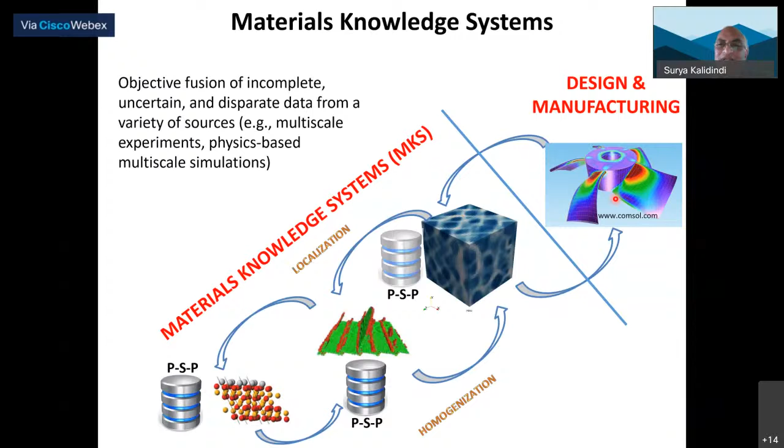And that's basically how the Google search engine works. It is continuously learning based on the queries, and once you have the queries, you reprioritize your internal knowledge systems, the way you're accumulating these knowledge systems. In some sense, it decouples the activities. So in material science and engineering, we could constantly be building these knowledge systems 24/7, and simultaneously give instant answers to the questions that come up. So that's a vision.

Now, some more details of how that can be implemented. One detail is that we have to define PSP linkages at different length scales. Again, in material science and engineering, process-structure-property has been used pretty much since the birth of the field. The only difference is that I'm extending it to different length scales.

As a specific example, I'm saying at a molecular scale, the placement of the positions of the atomic species or chemical species is a process variable. If I define that as a process variable, the electron density field would be a corresponding structure variable. And the property, just as an example, is bond energy. These lists are not supposed to be comprehensive. This is just to give you the ideas of what I'm thinking of with the picture before.

Now, you could argue that if our community gets together, we should be able to organize this. It shouldn't be that complicated. The main issue is that I think we'll settle very fast on mathematical definitions of process and property, because for the most part, they're very well defined.

What we're not going to settle on is the quantitative definition of structure. Exactly what do you mean by microstructure? What do you mean by interface atomic structure? How do you quantify that? Not a qualitative definition, but a quantitative definition. And that's where we're going to struggle.

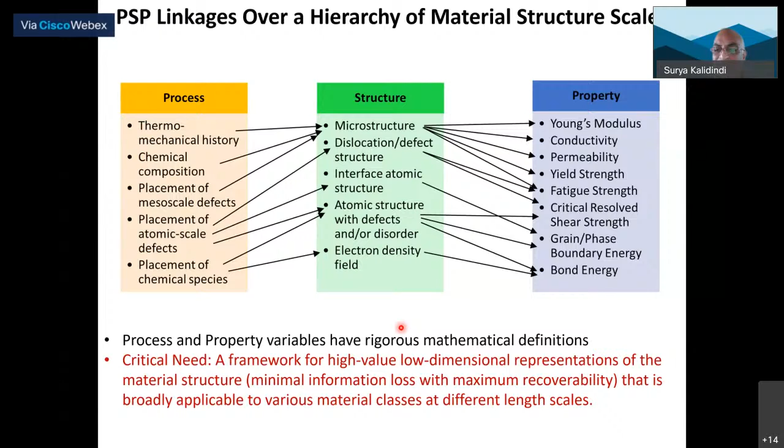Now, I have only one slide of the underlying math. It gets very complicated, so I'm not going to do too much of the underlying math. There are papers you can read if you're interested in this. But the way we are going to build these PSP linkages recognizes the uncertainty, but it also recognizes the fact that we have little data.

We have small data, as opposed to, say, driverless cars, for example. The people who are designing driverless car systems have an incredible amount of data. So we can't use the tools that they use. We need a different set of tools. So given those criteria, it turns out Bayesian learning, Bayesian frameworks, or Bayesian statistical learning, which is just an advanced version of statistics, that's all it is, is actually quite appropriate for what we want to do.

And the second question that we have to deal with is, what exactly are we going to learn using machine learning? Machine learning says you're trying to learn something, but exactly how do you define what it is that you're trying to learn? So the argument that I'm making in this paper and in this equation is that what we really want to learn is the governing physics in the phenomena, whether it is deformation mechanisms like Dr. Placid Rodriguez was interested in, or all the other things that we are interested in. For a given sample you give me, I want to know what is the governing physics in that sample.

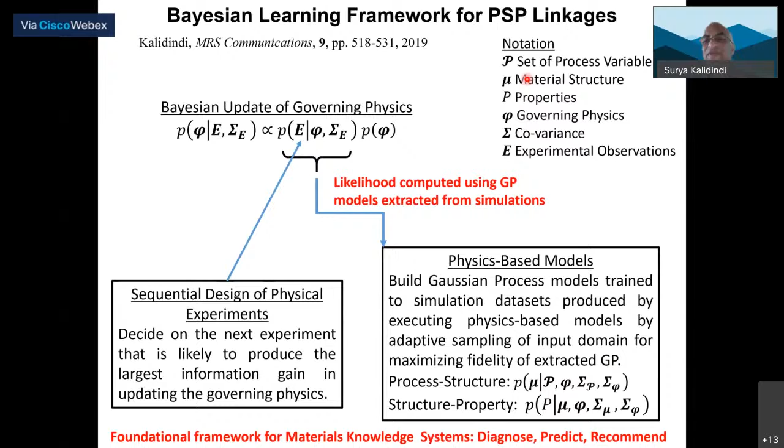So for this, we use the formalism of n-point spatial correlations. Spatial correlations are like autocorrelations and cross correlations. If you take this image and do an autocorrelation of it, you'll get this. The autocorrelation is called a 2-point correlation, because you can interpret it that way: the 2 points of interest are the 2 points separated by the vector, the tail of the vector and the head of the vector.

So the raw image is black and white. Every voxel in this simple example is either white or black. And the pattern you're seeing here is called a 2-point correlation, and it tells me something about the patterns I see here. For example, it's telling me that the most common pattern here is this cross. And keep in mind that this is periodic, and if you look at it carefully, you'll agree that, yeah, that's the most common pattern.

But there is more than 2-point statistics. There are a lot more things that can be computed. But essentially, this formalism is a way of quantifying the local neighborhoods you're likely to see. When you randomly pick a point in the microstructure and ask, what does my neighborhood look like, it gives a statistical description of that neighborhood.

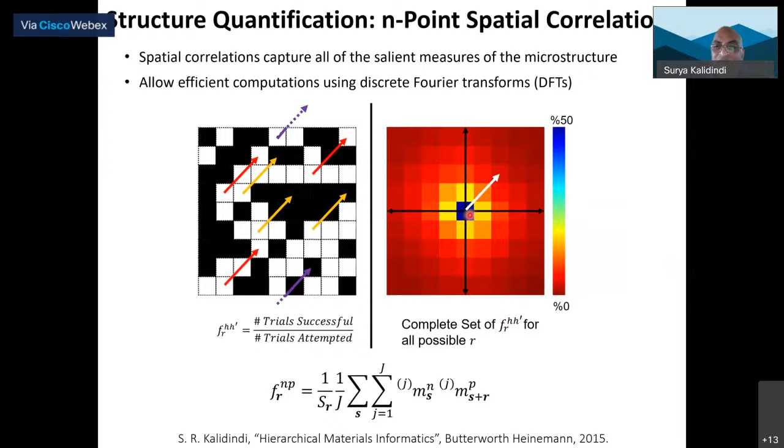So to be able to practically use it, I take all those features and do a PCA, a principal component analysis. And the principal component analysis is another orthogonal or Fourier representation, but in a discrete sense, because these are vectors essentially. So now I take all my features, put them into a vector, and then I can find the basis, and then I can find scores, PC scores. So it's pretty much like representing complicated functions in terms of sines and cosines and the weights of sines and cosines.

Turns out for most microstructures, the real feature vector is like this. But if I am willing to take a small approximation, I can represent all the statistics that I see here with just 3 numbers. I only need 3 final features. And if I have these 3 numbers, then I have a very good representation of the microstructure with all its complicated statistics. And now I can actually formulate my PSP models. So that's basically the story.

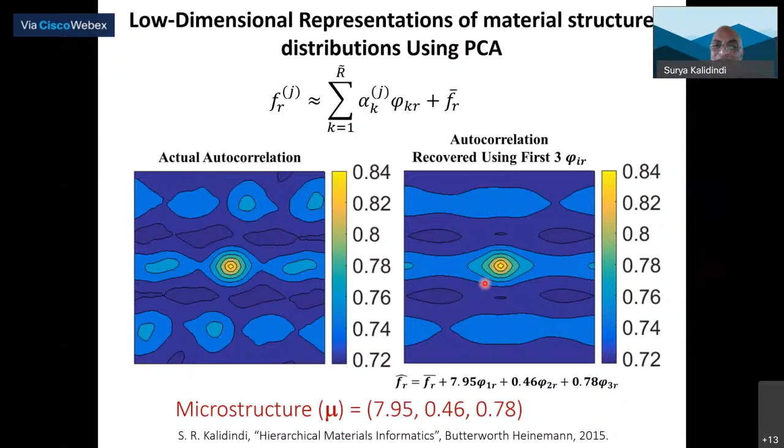I know I went over some of the details because they are very mathematical beyond what I just said. Happy to discuss with anybody who is interested, but that's about it. I'm not going to do any more than that.

Okay, so now examples. From now onwards, I'll just show you examples. Should be easier. So the one example that I have here, just to give you the sense and the power of the technique. This is a knowledge system that we created. In this knowledge system, you as a user can come in and put in a 3D RVE with any morphology. We have no restrictions on shape, size distributions, volume fractions, morphology, connectedness or not. It's up to you. You can put in any morphology you want.

Not only that, you as a user can also assign any hardening law to each of the phases. So we put no restrictions on what hardening law you can put for the red phase and what you put for the blue phase. Under the hood, we have already pre-computed these models using finite element analysis on example microstructures. So we created our own microstructures. We ran the finite element models. We created these models already.

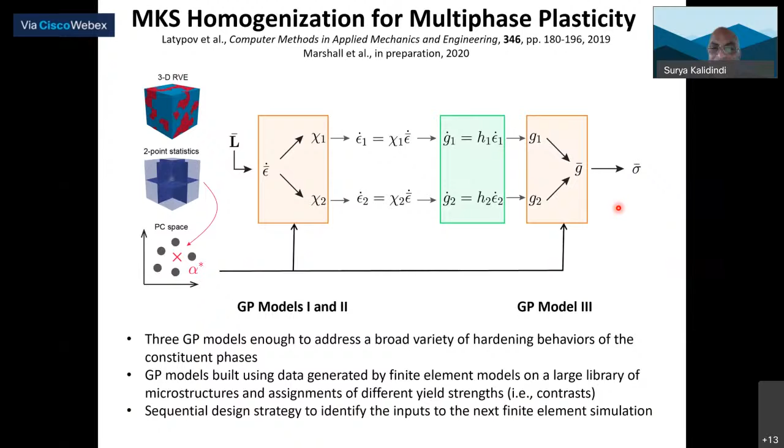And again, this is where things can change. Now if I know what people are looking for, next time they come, I can actually devise this methodology in such a way that I can give a better answer next time.

Okay? And all of this is fully autonomous, not just automated, but fully autonomous in the sense that the computer has been shown how to create these meshes. It'll create its own microstructures, creates its own finite element meshes, sends them to a finite element solver, takes the results, and automatically keeps adding data sets where it wants. And so it's continuously trying to improve itself as people ask for more things.

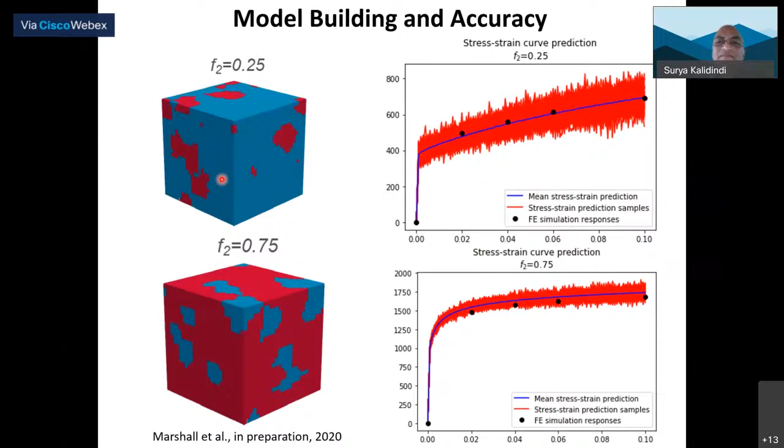Now that's a simple two-phase microstructure. Going forward, I can say that the same ideas, the same feature engineering, can be easily extended to 3D polycrystals. So now each voxel actually has a crystal orientation. It's not just a phase anymore. It actually has 3 Euler angles to define a crystal orientation.

And people generally use pole figures to see the texture, but that's what we call one-point statistics. 2-point statistics actually captures information like grain size distribution, grain neighborhood, and all that information is in the 2-point statistics. The feature engineering is exactly the same, and then it can make predictions for effective properties, modulus and yield strength.

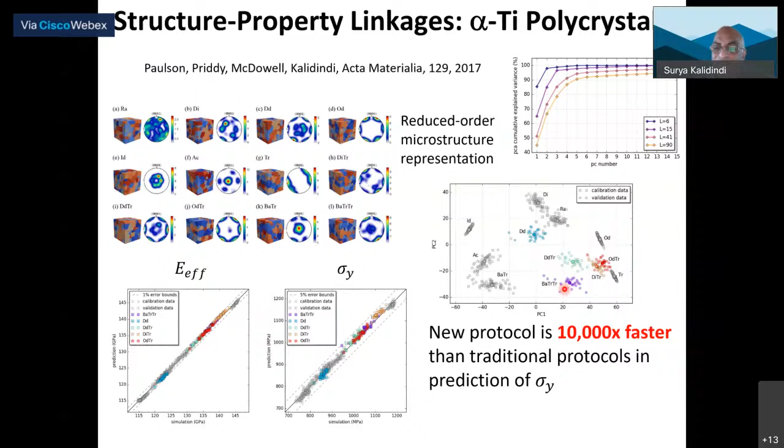Okay. And also, generally what we do is gray color points are the points that are used in calibration or training the model, and the colored ones are the ones that have not been in the process. The model building process has not seen them, so they're called test points. So the idea is to show that the test points are well predicted without an overfit. Right? So the biggest thing you worry about is overfit in all these models.

This is not just mechanical. You can actually take porous solids. Now the RVE is porous, and now we are actually predicting permeability, flow. And that's complicated because flow depends on connectivity. Yet I'm still using the same n-point correlations. They're slightly different, but essentially the same framework. The feature engineering part doesn't change a lot. And we are able to make predictions of permeability.

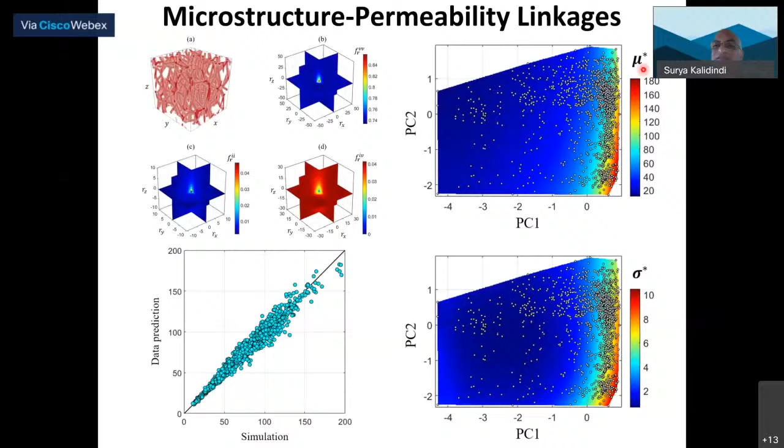Again, this is a parity plot. This is the mean prediction. So one dot is for one structure, different dots are for different structures. And this is the uncertainty. So this is the mean value, this is uncertainty. And you can see they're pretty decent.

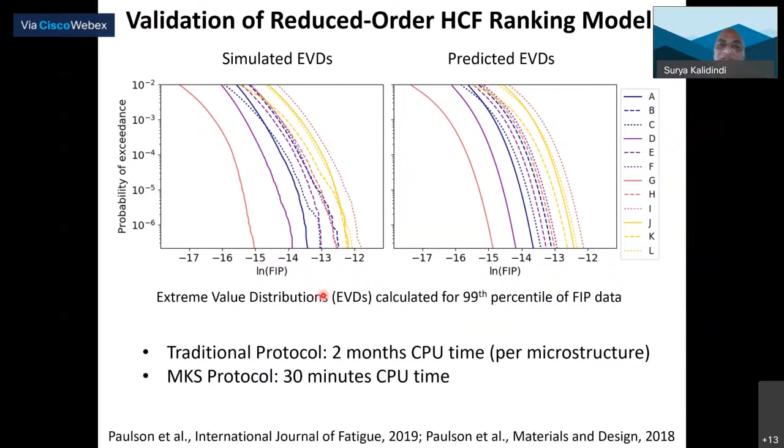And if you are using physics-based models, you would use crystal plasticity models to compute them, and they take a long time. Each simulation takes a very, very long time. And these are much faster on a relative basis. You can see the comparison. And the ranking is about the same. Of course, there are some differences, but the ranking is roughly the same. And the fit is pretty good.

And because we're looking at microstructures in terms of these PC scores, the predictions are showing how well the low dimensional representation of the microstructure is captured in this evolution. So it's not restricted to just static problems. You can actually do temporal problems, temporal evolution of microstructure.

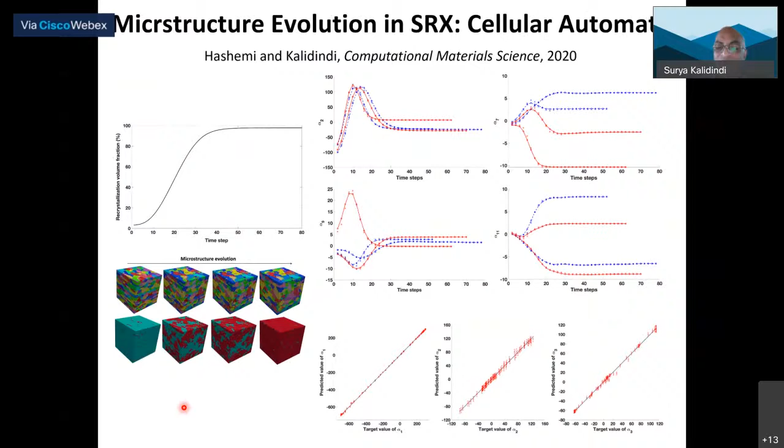It's also not restricted to mesoscale. You can do the same with the atomic scale. So we take atom positions, we voxelize it, then we do 2-point correlations, PCA where necessary, more or less the same feature engineering, but maybe slightly different in the model building part. And here there's a large data set of compounds, and we are predicting the formation energy. And it does a decent job over 1,800 different compounds.

This is grain boundary mobility in a single material system. The data here comes from MD simulations. In the previous case, the data came from a public repository. We just downloaded the data. Here, the data comes from very expensive simulations, so I don't have as much data. And yet we can show that the feasibility of building these low dimensional models is still very much there.

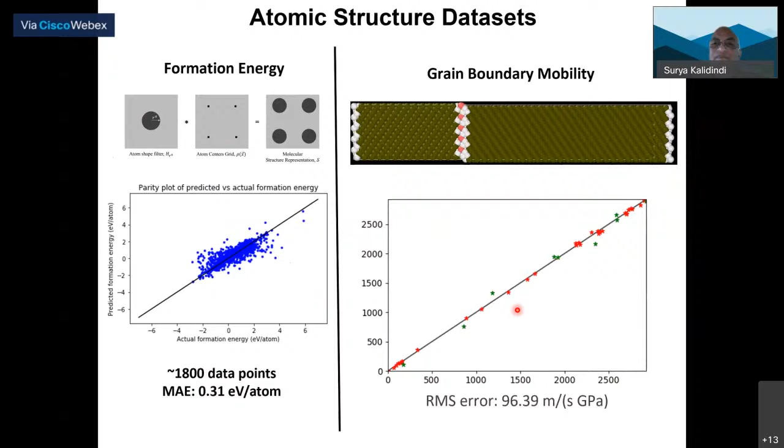Everything I showed there is about homogenized properties. It turns out that another version of this can actually predict the local fields. So now we're not just interested in the effective properties of the microstructure, but we want to see the strain field or stress field, voxel by voxel.

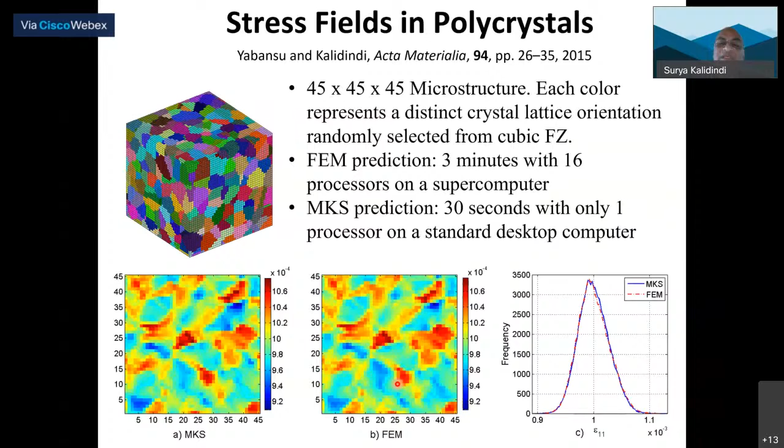This is elasticity. You can do the same in plasticity. In plasticity, you worry about the plastic strain rate tensor, and these are the 6 components of it. We can do every component in every voxel for any microstructure of that material system. We are now beginning to say any material system, but we are still working on that.

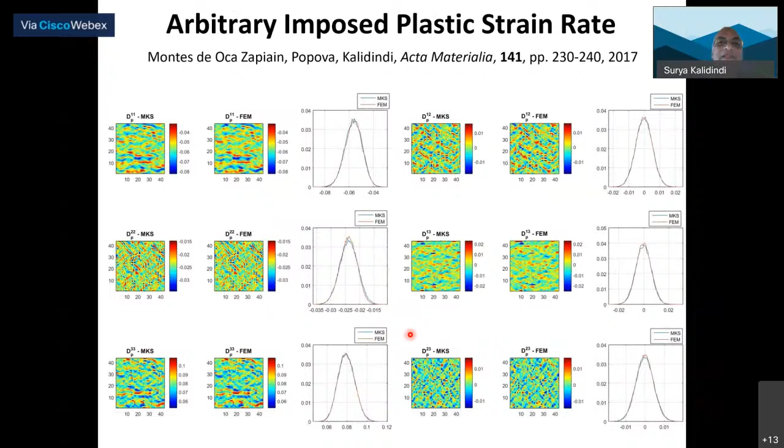So these are the big things I want you to keep in mind before I stop that part of the talk: these are broadly applicable knowledge systems. We are trying to be very efficient in how we build this, such that we don't have to go back and rebuild these models all the time. Because then we really haven't addressed the problem.

Now you get a sense of what we are doing and how we are capturing knowledge from physics-based models. On the experimental side, we are also asking how we can generate more data. Most of the classical experiments in material science are what I call high quality but low quantity experiments. In other words, we get few data points, but they are very high quality because you take great pains to prepare samples and document a lot.

That definitely helps science and solves a lot of science problems. But if your target is to speed up innovation, you want guidance so you can rapidly screen materials and get a lot of data. You're willing to accept a little bit of uncertainty or error if you can get a lot more data at the same time. So that's the paradigm - where is the trade-off in quality versus quantity?

These are all high throughput methods that we are interested in. We want to develop these methods and see how we can speed up materials design or materials exploration, which is a very large space because it includes chemical compositions and process histories. Every time you change the process history, it's another material, and we want to characterize and understand it very fast.

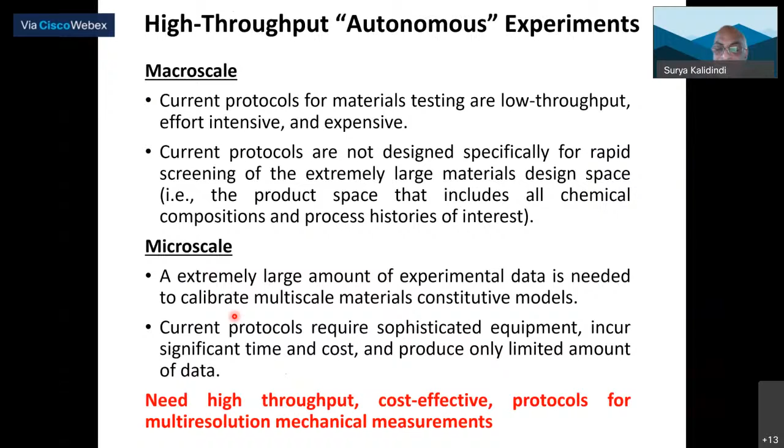The technique that we have largely spent our time on for mechanical properties is indentation. This is an indentation stress strain curve - raw data, you get a load displacement curve. These are spherical indenters, not sharp indenters. The advantage of spherical indenters is there's a very small elastic portion.

By looking at it, you can't tell where the elastic portion is, so you need an analysis protocol. We developed the right analysis protocol to identify this elastic portion, but it's extremely small, tiny - you can hardly see it. If you identify that elastic portion correctly and apply Hertz theory, the equations here are nothing but Hertz theory, with just a generalization of the definition of strain. That's the only addition on this side.

If you adopt these four equations and identify the elastic portion correctly, you can convert this load displacement curve, which looks very smooth, into something more useful. You can't tell by looking at the raw curve where the elastic portion is versus the plastic portion. But if you do the analysis right, you get a beautiful stress strain curve where you can see the elastic portion and the plastic portion, and now you can do an offset yield strength definition.

So these are indentation parameters. This is an indentation modulus - you can define the slope of this line as the indentation modulus. You can define this as the indentation yield strength. So you can basically do this very fast. Once you learn how to do that, you can do this very fast.

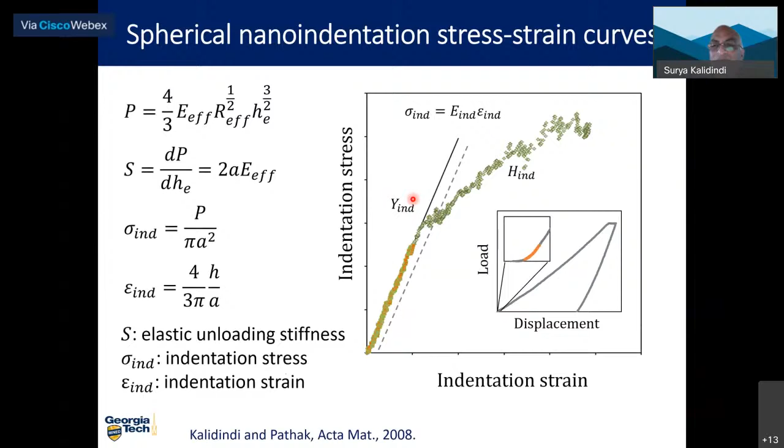So those are indentation quantities. How do you convert them to uniaxial quantities? We went through a lot of finite element simulations again, where we can prescribe the physics. So we said, if we assume that the material is isotropic and just does J2 flow theory, how do I convert? It turns out you only need 3 scaling factors.

And if you apply these 3 scaling factors, you'll get a very good match between the uniaxial curve. So in both cases, the red curve is a uniaxial curve. The blue dots are from indentation, but scaled by these quantities. So once I scale this, then I can get a pretty good match.

And it happens independent of hardening laws. So the material can show all kinds of different material. Again, we have done a lot, all the way from very hard and high hardening rate materials to low, soft and low hardening materials.

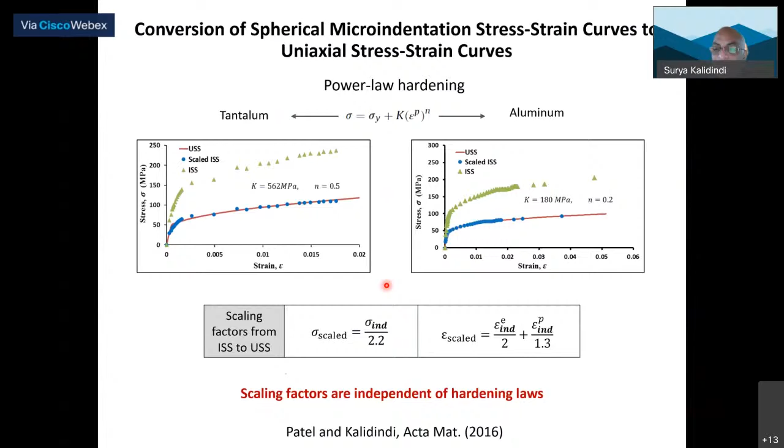This particular one is along the same lines, but this time we wanted to know what is the error in just the estimation of the yield point, not the entire stress strain curve, just the yield point. And we are showing that these techniques are much better, much more accurate than the current techniques that people are using to convert hardness into yield strength, compared to any of them.

And again, keep in mind the range, right? The range is very large, right? So again, it's from this end to that end. And we are covering a very large range of yield strengths, and we are still getting pretty good answers.

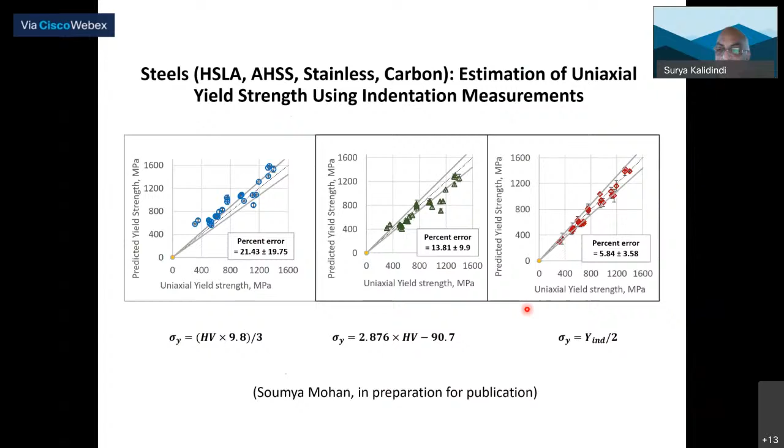Now, how do we use some of these techniques? One of the things we have done is to look at high throughput synthesis and exploration. So this particular sample was made by LENS, and it has a gradient. It was made by Pete Collins at Iowa State University. Here he is getting a composition gradient from titanium at one end to titanium manganese at the other end, so you get different chemical chemistries.

And then he makes bars, and then he post heat treats them. After making the bars, he is post heat treating them at 3 different temperatures. So we have 3 bars. And then of course we can do microstructure analysis and quantification, so on and so forth.

To get various measures like chord length distributions, volume fractions, and other things. But most importantly, we can actually get the mechanical properties just as fast, almost as fast as you can get the rest of it. In fact, the samples are the same samples. We are doing the microstructure, and after we get the microstructures, then we are just indenting.

So in some sense, the added cost is very little. And you can already see that some heat treatments are giving us much higher yield strengths than the other ones. So we can actually rapidly explore.

But using these Gaussian models that I talked about, you can also ask about sensitivity and things like that. So you can actually see that once you start analyzing this, you can actually tell which are the more important variables. So for example, what this says is for the chord length in the beta, the size of the beta is a lot more affected by the temperature, because that has one of the lowest values here. So the lower the value of L in the GP models, the higher the sensitivity, that kind of stuff.

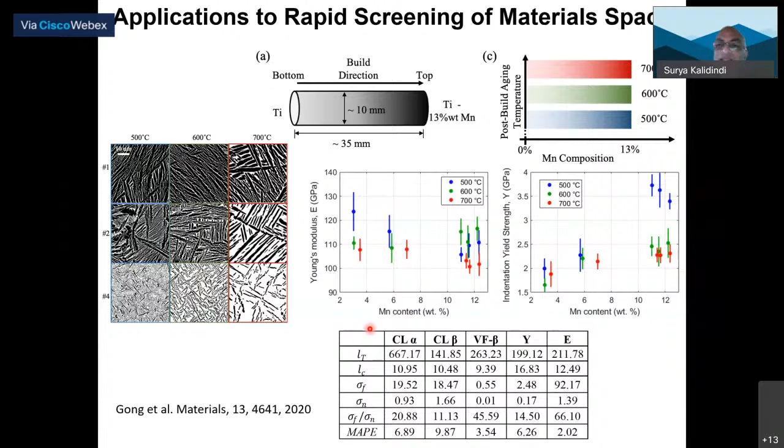So you can analyze and understand what the sensitivities are, which then informs you as to what you should be doing next. If I'm not happy and I think I didn't cover my space well, where should I be, depending on the target I have, what other experiments should I be doing, and things like that. So that's what that helps.

So that is at the bulk level or effective level, but we can also do things at the local level. So in a DP steel, we are getting properties in the martensite, with these small indenters, the indenter radius is shown here. So the actual indentation size is really, really small, much smaller than 1 micron. Typically the difference between the indenter size and the indentation zone size is about 1/10 of the indenter size. So you can actually compute how small these zones are.

So in this particular case, we are looking at processing of these DP steels. The first set of numbers is the annealing temperature, the second set is the deformation. After annealing, you deform it by 10% in this case, a rolling reduction, and then you do a 170 degree bake hardening.

Of course we can do as many as we want, but in this particular case what we're showing is that as you increase the annealing temperature, the martensite is actually getting softer, a pretty strong drop in the local strength of the martensite. But the ferrite is pretty much constant, nothing changing in the ferrite itself, the blue.

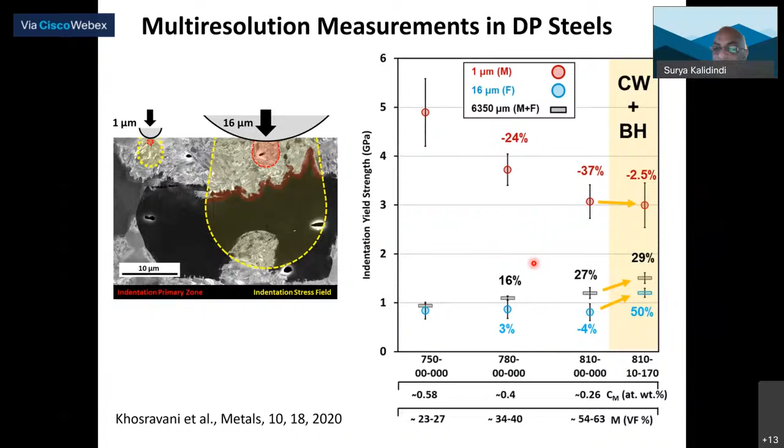So by being able to get this kind of information fast on complex materials, we are getting a lot of very useful data that can be fed into the physics-based models. That's the feedback into the physics-based models. Now, almost the last couple of slides, one or two left.

How do I bring all these things together? This is the vision of my future lab, which we're hoping to build in the next couple of years. In this lab, what we want to do is constantly build this knowledge system by simulation. We run indentation, the physics-based modeling is all finite element.

So we can run a lot of simulations, specify different physics, different elastic behavior, different plastic behavior, and make this fully autonomous, so it can continuously keep running and building this knowledge system, as I said before. This is a knowledge system being built based on simulations.

In the experiment, when you go into your lab, you say, oh, I have this sample and all these grains I could indent, but each indentation costs me something, so I have to decide which grain I want to indent. Then the system in the lab leverages this knowledge system and ranks the value, the information gain.

If you do an indentation here, there's a certain information gain. So in this particular case it's saying you're much better off doing an indentation in this grain as opposed to some others where the information gain is very low. So the system does an indentation there, takes a value, and goes back to check.

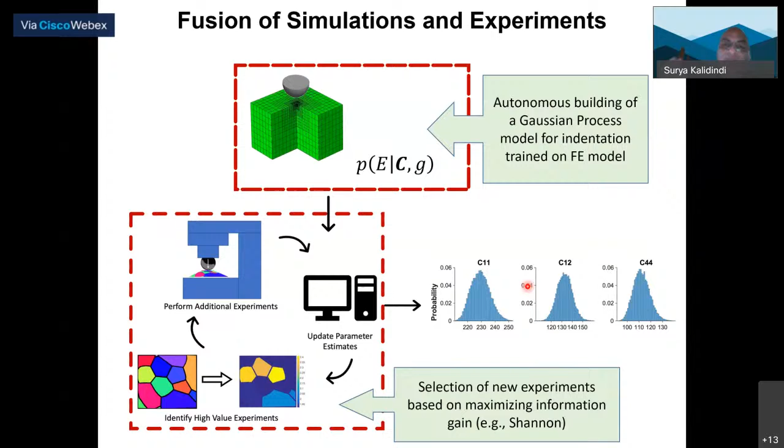It's amazing because, for example, if we're getting elastic constants, it turns out in cubic crystals, if you do 4 indentations in properly selected grains, you get pretty much the answer. After that, everything else you do doesn't get you much further improvement in the estimates of the single crystal elastic constants from polycrystalline samples.

Now, of course, elastic constants are somewhat known already, not that interesting. The more interesting thing is if we can actually predict the CRSS values, critical resolved shear stress values, in hexagonal systems of different chemistries, where we have different slip systems, pyramidal, basal, and all those things. So what can we do?

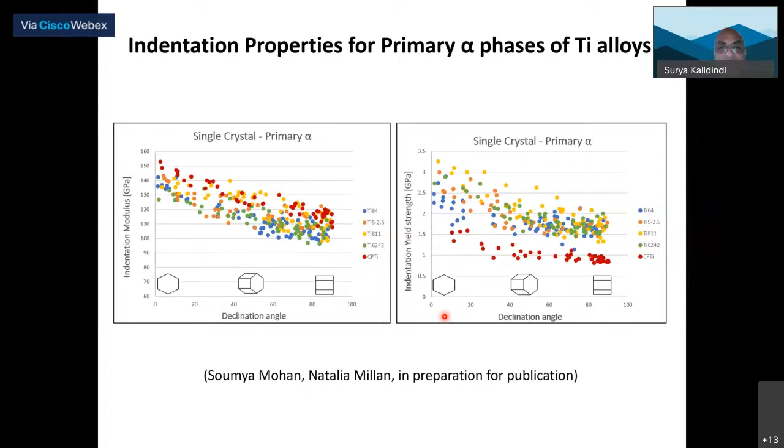And that's the inherent limitation of this methodology, in the sense that given the samples we have, we are not able to get anything better than that. That's about what you can get from this methodology. But knowing that gives you a lot of power, because now you can decide when to engage this source and when not to engage this source. Okay? I think this is my last slide.

So for that, we again do the same thing. In this case, the physics-based model is still a finite element model. So we do a finite element model with a lot of different physics, plasticity physics, and we create a database, we create a knowledge system. And then when you do the actual experiment, you have the experimental curve.

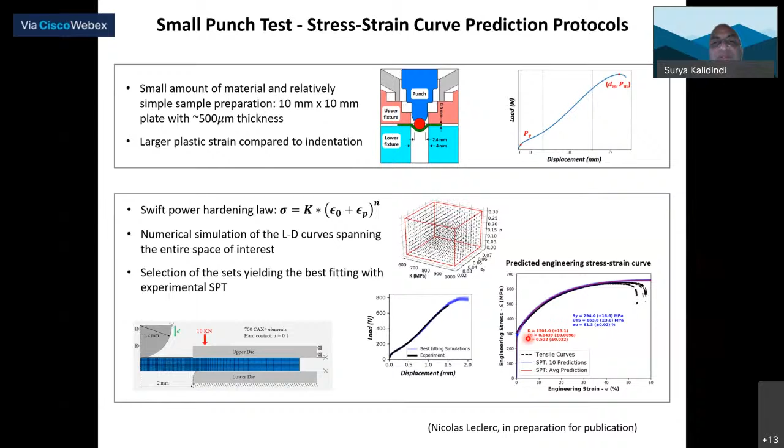We are able to come back and say, based on that experiment, the tensile stress strain curve or uniaxial stress strain curve for that material looks like that. And again, the purple is the prediction, the black lines are the real experiments for a particular sample. So you can see that the same methodology works even for SPT. So with that, I think I'm going to stop here and take questions.

The take home messages are that data science and machine learning has made tremendous progress where it is actually ready for domain scientists in materials and manufacturing to take advantage of what they offer. But the way you apply them has to be very carefully thought through. Usually a brute force application of machine learning tools will not give you the kind of results I'm showing you. But if you properly apply them, you can get insights that you would otherwise not get.

The second take-home message is we do need to develop high throughput assays or synthesis and evaluation protocols so that we can generate larger amounts of data so that we can make smart decisions, especially if you want to accelerate materials innovation. If you want to bring the materials innovation cycles in line with other design cycles, you do have to design, develop, and adopt high throughput methods.

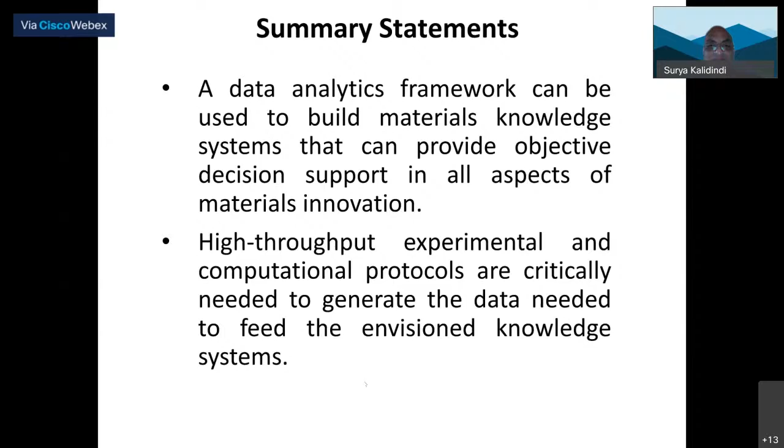Thank you so much, sir, for a memorable lecture, giving us an overview of emerging paradigms in materials innovation, depicting the core knowledge needed to support accelerated materials innovation, explaining ways for addressing challenges related to accelerated materials discovery and development, the central focus of the materials genome initiative, importance of data analytics and machine learning tools, and multi-resolution high-throughput mechanical testing. Thank you once again, sir.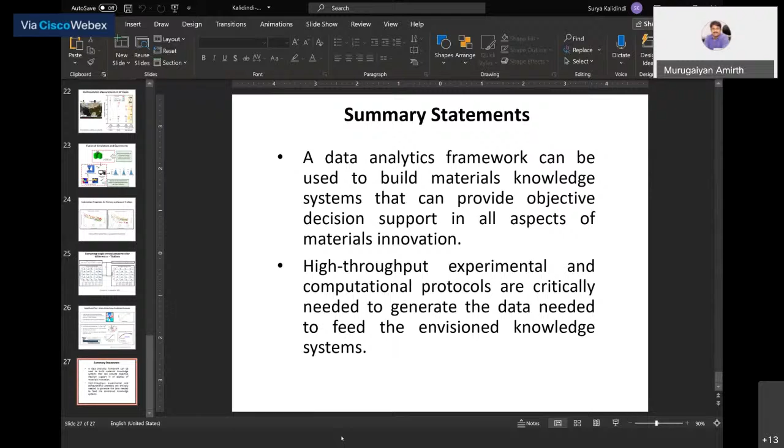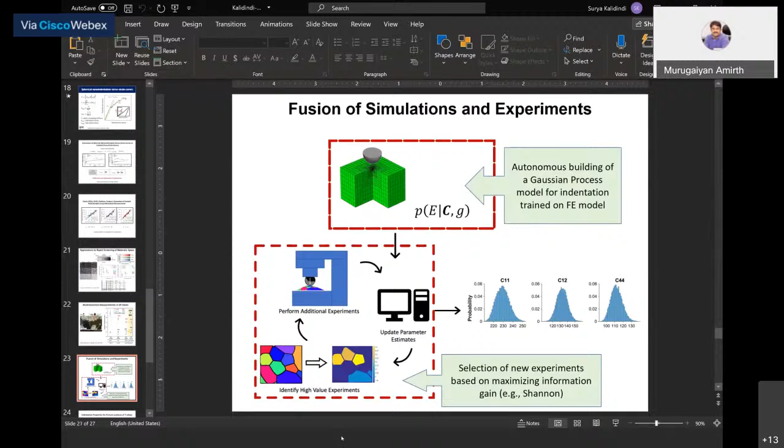So in this particular one, we didn't do this, but in a simpler material, a single phase material, I think it was aluminum alloys, we did studies where we systematically approached the interface. So we are doing indentation as a function of the distance from the interface. So in that sense, we are indirectly interrogating the role of the interface, because when you go far away from the interface and do a very local indentation, it doesn't even know there is an interface. But as you systematically come closer, you can start seeing the differences.

And by studying the differences, and again, in almost all the methods, one part you have to focus on is what data you are collecting, and you have to be very clever in how you design your experiments.

There's no way around it. But to make sense of the measurements that you have, you need a model. Without a model, it's very difficult to make sense of any of these measurements, right? So in order to make sense of the effect of the interface, you need a suitable interface model. But if you have an interface model and I have these measurements, now I can say something about the interface.

Good. Right? Does it make sense? Yes, exactly. Okay, thank you. So I see Dr. Bakshi.

So, it's a very nice lecture. Nice to see the extent to which we can use these techniques in predicting things. And I've been thinking of learning machine learning for some time, so this is a good start for me.

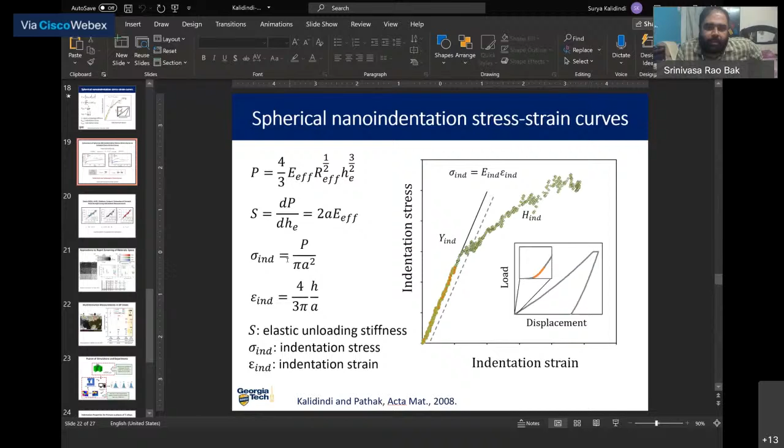I wanted to know, if you had used voxels to quantify a microstructure, how does the size of this voxel affect the parameter that you get to quantify? So how do you decide that? Excellent question. These are all very important questions. Because I'm using PCA, you have to standardize voxel size. If you mix up voxels of different sizes in one study, then you're mixing apples and oranges. You don't get anything useful. So you do have to standardize.

As for how you standardize, because I'm using FFT algorithms, the signal processing people have already told us that the smallest feature should have at least two voxels in each direction. That's a minimum, a lower end estimate. Voxels cannot be so large that you have only one voxel in one of the regions. It has to have two in each direction, so in 3D you should have at least eight. So that's the minimum side.

On the maximum side, you can of course have many more voxels, but then the computational cost goes up, so you make a trade-off saying I cannot afford more than this many voxels. And to standardize the voxels, there are a whole lot of signal filtering techniques. If you use one voxel size for one study and then change it for the next one, you're basically remapping the microstructure, and there are a lot of signal processing tools that let you remap depending on your needs. I hope that answered your question.

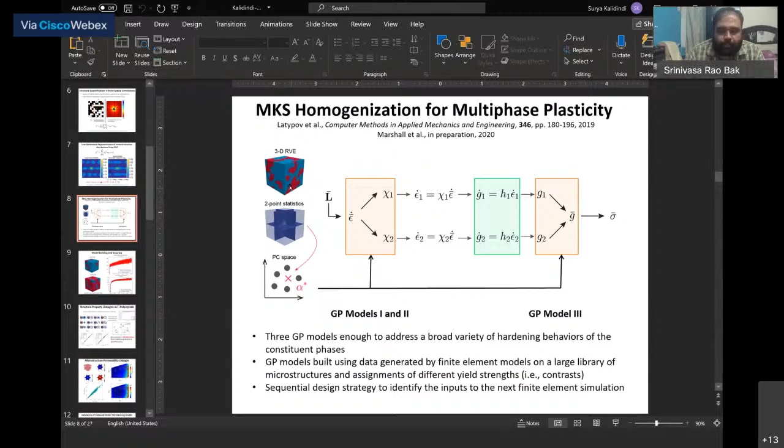Some time back, I had attempted quantifying the effect of carbon nanotube distribution in the microstructure on the mechanical properties, trying to quantify the microstructure in very basic terms and correlate the variation in the nanoindentation data to the variation in the volume fraction in each zone throughout the microstructure. So it would be very interesting to see how we can apply this more advanced knowledge to that kind of nanocomposite.

In these plots, I forgot to say this, but it's there in the papers. In this kind of representation, the center voxel is always volume fraction. It's not true for all representations. So one of the features is always volume fraction, so that information is there within the representation, but it has more than that. The rest of the statistics tell me something about the shape, size, location and all those things. But I agree with you, it'd be useful to look at these tools to see whether they offer any value.

Thanks, Dr. Bakshi. And I see a question from Dr. Satyesh Yadav from IIT Madras. His question is, do we expect to have a lab where robots would make alloys and optimize the process parameters with the help of machine learning to get desired properties in future?

We don't just expect to, we are already building one, right? We are in the process of building one. That's what I meant by saying these are not too far away. It may not work, right? I don't know whether it will work or not, but we feel strongly enough that we should build one, and we have funding for it, so we are going to build one.

So we'll see what happens. Yeah, great. Good answer. Dr. Satyesh, does that answer your question? I think I see you in the line. Yes, sir. Yes, sir. Professor Surya, thanks a lot for this excellent lecture.

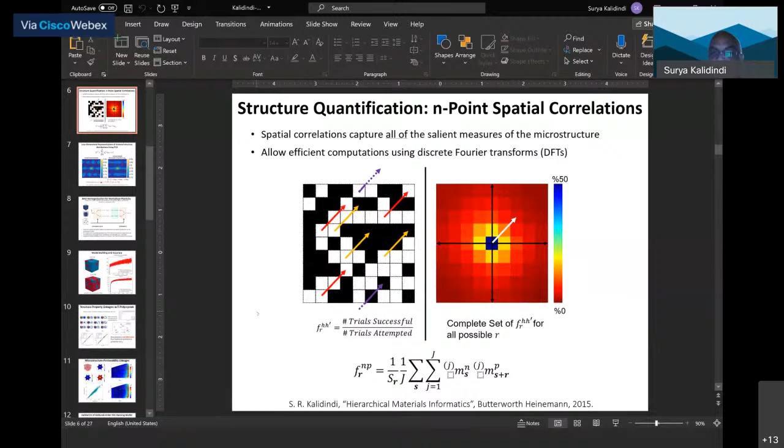But that's not a general statement. There are some places where things fall apart, and there you need more information. And when you go from this representation to the PCA one, you give up a lot more information, so it becomes harder to get everything back. But you'll get something that looks similar, because every point in this map is a statistic, and what you give up is the difference. Once you adopt this, that difference is gone forever. There's no way to recover that.

Make sense? Okay. I hope Mr. Hariharan got the answer to his question. Maybe one more question within the time. We have 5 more minutes to wind up. From Mr. Sujit Kumar.

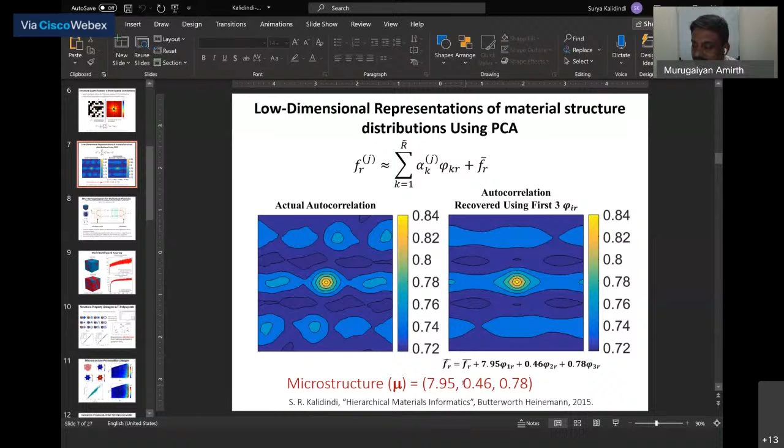Professor, you are using 2 different indenter geometries for analysis, 1 micron and 16 micron. Does the size of the indenter tip have any influence on the measured property? Okay, that is a very good question. There's a lot of literature on what is called the indentation size effect, ISE, and that is a very different thing. They're not talking about different indenter tip sizes. They find a different value of hardness with increasing indentation depth. So that's a very different phenomenon, not what I'm talking about.

But in our case, when you go to very, very small indenter sizes, you get what are called pop-ins. At very small sizes you're not able to establish a Frank-Read source, so you cannot get the smooth transition from elastic to plastic. It builds up until the zone size is big enough that it can release a Frank-Read source, and then suddenly there's a burst of plastic deformation.

So there are size effects of that kind, but no size effects where a different indenter size gives a different yield strength. In our techniques, if you take a single crystal material and do indentations with different indenter sizes, you should expect the same yield strength, and we get the same yield strength, except at very small sizes where you get these pop-ins.